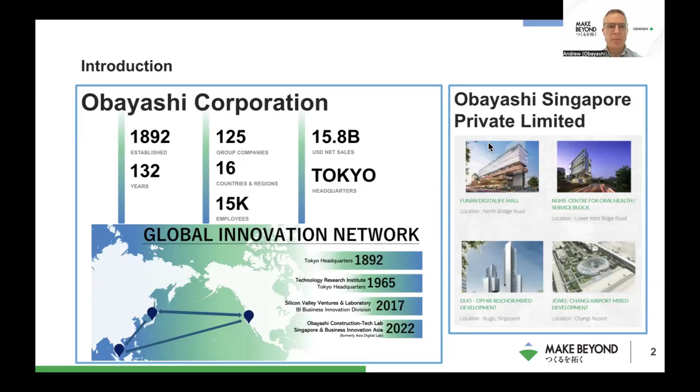Okay, next slide, please. So I'll hand over to Haruna now, who's going to explain more about our problem statement.

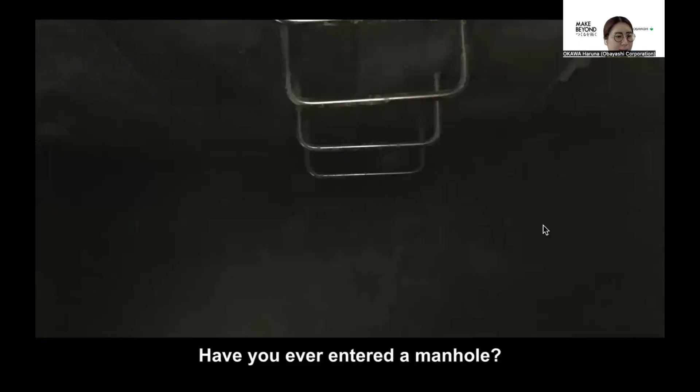Yes, thank you, Andrew. So now I'm jumping to the actual challenge statement, and I'd like to start from some questions. Like, have you ever looked inside a manhole? Next slide, please. And have you ever even entered a manhole? Next slide, please. I think the space beneath a manhole is one of the toughest working environments on a construction site. And actually, I was shocked when I started my career in construction industry and watching workers go inside and working in a toughest environment.

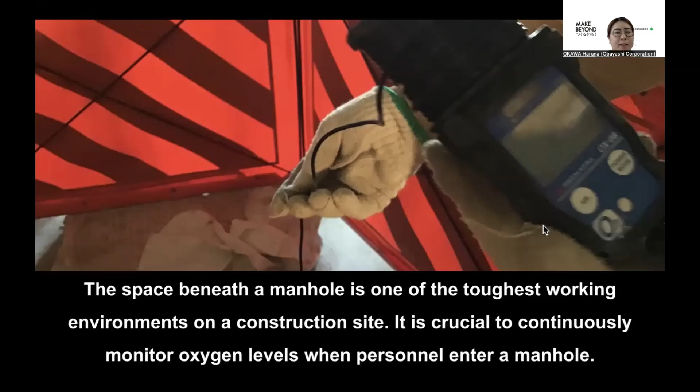And we think, for this process, it is crucial to continuously monitor oxygen levels when personnel enter a manhole. And we, Obayashi, would really like to improve this work environment and thus are presenting this challenge statement today. Next slide, please.

So the current process has a lot of problems. First, the physical strain. The workers face significant strain in non-standing positions while working beneath the manhole. And dust and fumes. Grinding and chipping produce health-risking dust and fumes. So typically, beneath the manhole, there's a pit, and it requires a waterproofing process. And in order to move to the waterproofing process, first we need to smoothen the surface of the concrete. And there, grinding and chipping take place, producing dust and fumes.

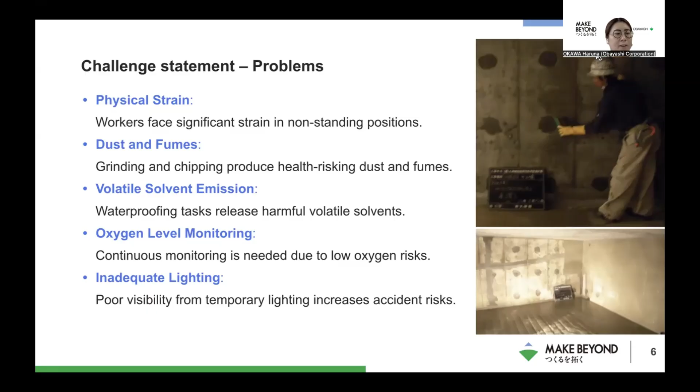And thirdly, volatile solvent emission. So waterproofing tasks release harmful volatile solvents. And oxygen level monitoring. So continuous monitoring is needed due to low oxygen risks. And finally, inadequate lighting. So poor visibility from temporary lighting increases accident risks. So these are current problems you are facing when working beneath the manhole. Next slide, please.

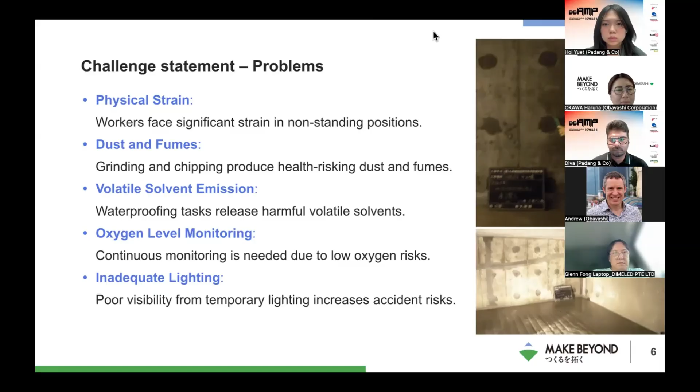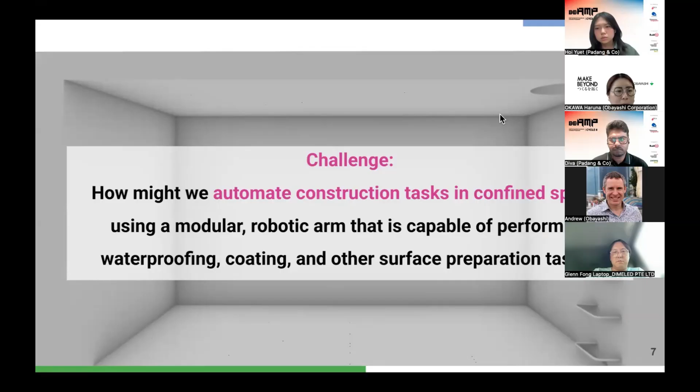So our challenge statement is, how might we automate construction tasks in confined spaces using a modular robotic arm that is capable of performing waterproofing, coating, and other surface preparation tasks? Next, please.

So this is a brief overview of the current process. So we start from surface preparation, and then we apply primer and move to the first layer application and cloth application if necessary. Then second layer application to top coat protective mortar application if necessary. So the grey processes are optional for this BEAMP program. We are looking essentially at the pink portion, the primer application, first and second layer application of the waterproofing materials.

So next is what kind of materials are used. So typically we use primer and we apply approximately 0.1 to 0.2 kilograms per square meter. And for first and second layer coating, we use approximately 1.0 to 2.0 kilograms per square meter. And for top coating, approximately 0.3 to 2.0 kilograms per square meter are used. And according to the different materials, we use brush, roller, or trowel. And next slide, please.

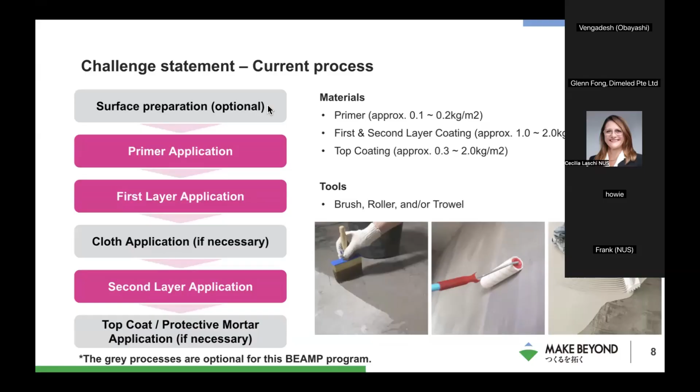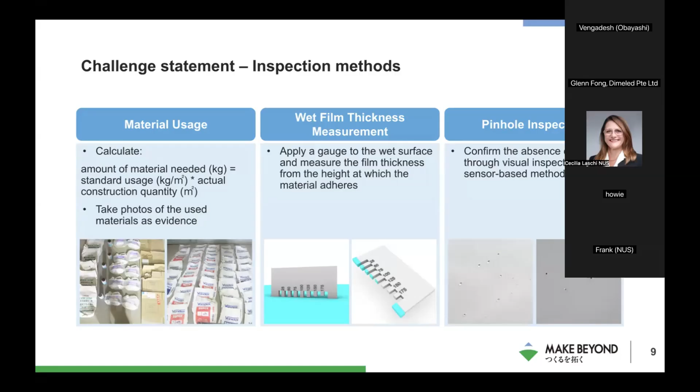And secondly, we use wet film thickness measurement. There's a special gauge that is used for measuring the film thickness, and we apply the gauge to the wet surface and measure the film thickness from the height at which the material adheres. So from there we can see the film thickness of the materials applied, and we make sure that it reaches the minimum required film thickness.

And finally, we do pinhole inspections. The pinholes are like micro holes, which you can see in the bottom photos. And we confirm the absence of pinholes through visual inspection or sensor-based methods. The reason why we put these inspection methods here is that when automating and using robots to replace the current conventional method, we're also looking to automate these inspection methods using robots as well. So preferably the application should consider how we can inspect the quality of the work done by the robot using the robot.

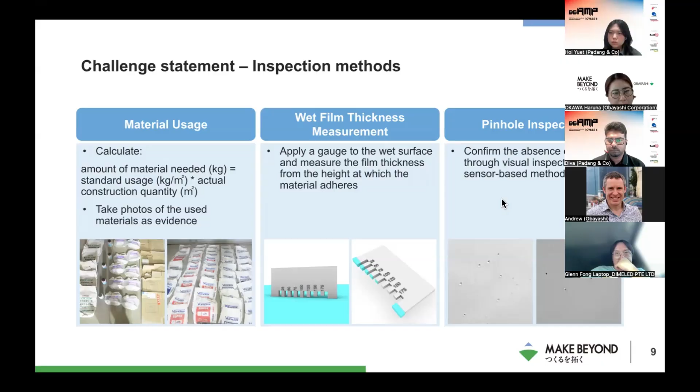Next slide, please. And now moving on to the requirement. For us, the most important requirement is that the robot can perform tasks without a person entering the confined space and access all 6 surfaces of a pit, measuring approximately 6 meters by 2 to 3 meters by 3 to 4 meters. And it is advisable to position the robot above the pit. However, this is not a requirement. So we are looking at robotic solutions that can address this waterproofing work beneath the manhole without requiring personnel to enter inside the pit.

And our recommendation is to place the robot on the upper slab, because you'd like to cover the entire 6 surfaces of the pit, and it would be better if we place the robot outside the space so that it can reach all the faces. So that is our requirement. Next slide, please.

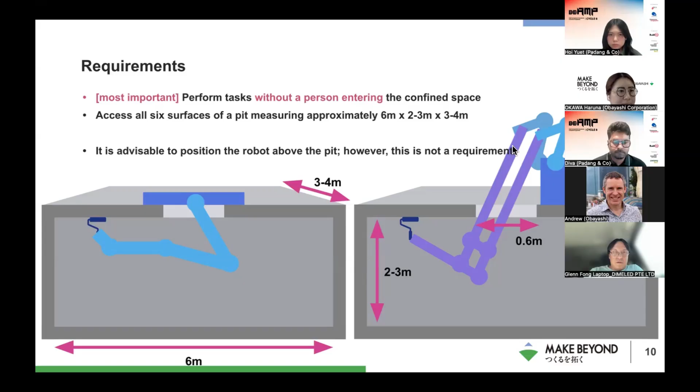And for POC and pilot, initially we are thinking to conduct the POC by installing a mock-up at the BCA Braddell campus, where we have our office. And regarding the commercial viability of this program, first, tasks in confined spaces exist at all sites. So once this solution is ready to be applied on construction sites, the target sites will be literally all the sites in the construction industry.

And secondly, a robot that can work in confined spaces can also work in regular areas, which is not possible in the reverse way. So if one could address these works in confined space, that robotic solution will be versatile and can be applied in regular areas. And we think there's a big potential market associated with these challenges in robotic solutions in confined space. Yes, that's all from Obayashi.

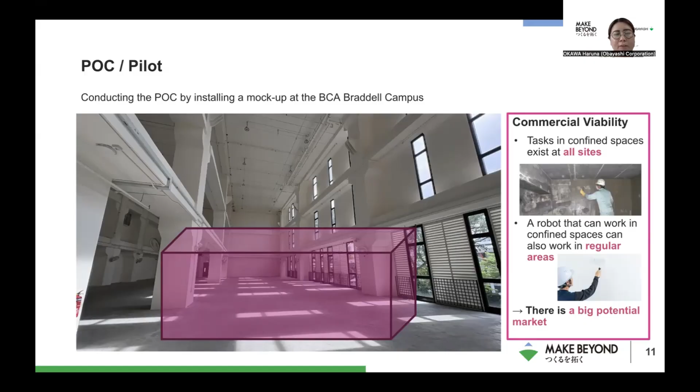Got it. In addition to beams and manholes, is there any other type of obstacle? Yes, but I think for this one, because this is POC, we can start from the simple setting configuration. So at this point, we don't need to consider any other obstacles, I think. Got it. And last question from Frank, can we fix some sensors on the wall? Depending on the sensor, I guess. All right. Hope that answered all your questions, Frank.

Next from Jackson. Hi, would like to clarify how big is the opening of the confined space? I think this is already explained. It's 600 mm. Then next question from Cecilia. Did you consider soft robotic arms? So I think the solution can be either industrial robotic arm or cobot or soft robotic arms. We don't restrict the types of the robot. Yeah, hope that answered your question.

Next question from Glenn, who's another CSO on the call. Are there any constraints in terms of the site condition blocked by a structure, beam, etc.? Sometimes we see the beams, but I think we can start from the simpler configurations for the POC. Got it. We have a next question from Elliot.

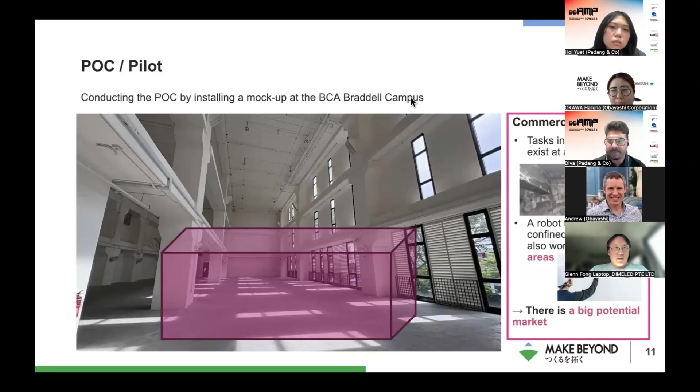What's the funding size and timeline? I think I can sort of answer from the BEAMP perspective. So this is completely based on the proposal that you're going to put forth. The timeline will either fit the ASD or MD track that earlier was explained by Jiaming. And depending on the scope of the project, you will either go through a 6-month or 1.5-year timeline in execution. Both of these tracks have different funding ranges. ASD is 50,000, MD is up to 250,000. So you may reasonably scope the pilot that you have in mind to solve this problem, and then we can see which track you fit the best.

Next from Glenn as well. Can the robot be deployed inside to move on its own rather than attached to a structure from outside? Yes, so we don't restrict the robot solutions. I thought both approaches possible. One thing we need to keep in mind is that we are applying the coating materials to all the surfaces of the pit. So if we deploy the robot inside the pit, the footprint of the robot cannot be painted. So we may need to have 2 phases of the painting process.

So in the first phase, the robot is on half of the space, and then applies the coating on the other side. And then once the coating is dried, the robot moves to the other place so that it can cover the entire surface. So this will add an additional process, but I think we don't restrict any robotic solutions. So either way is possible, but I think it is advisable to consider placing the robot outside the pit. Cool. Thank you. Hope that answers your question, Glenn.